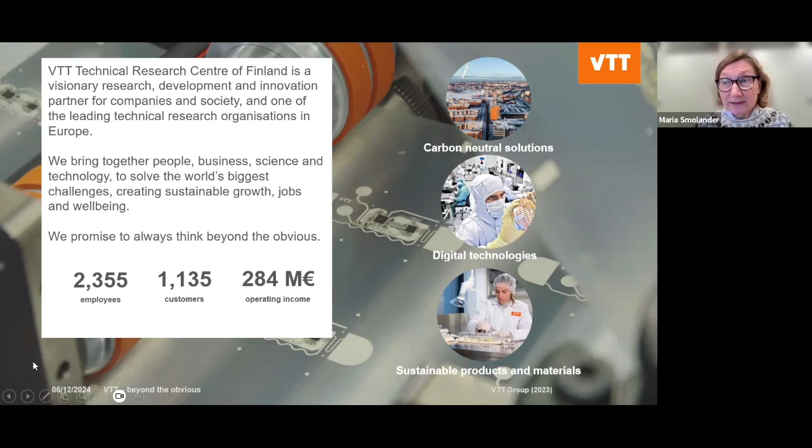We have divided our activities into three business areas: carbon neutral solutions, digital technologies, and sustainable products and materials. Flexible and printed electronics is in the digital technologies business area, but we collaborate a lot with colleagues in sustainable products and materials, who produce materials that we use. We also work with colleagues in carbon neutral solutions, who, for instance, apply the battery solutions we develop at cell level in our research area, for mobility applications. So this is very shortly about VTT.

As said, we have really been tackling sustainability, including the sustainability of flexible electronics, for a couple of years now, and we are very motivated to do that. This is, of course, because we, as everybody else, see that the amount of electronic devices in society is increasing all the time. We need electronics for digital transition, for connectivity, for different household applications, transportation, and applications in health and well-being. And of course, this increasing amount of devices is also bringing more and more electronic waste around us.

For instance, between the years 2010 and 2022, the amount of e-waste almost doubled. At the moment, a bit more than 20% of e-waste is formally, properly collected and recycled. This recycling rate is increasing all the time, but because the amount of waste is increasing so rapidly, waste generation is outpacing the recycling rate. So all the time we are accumulating more and more waste around us.

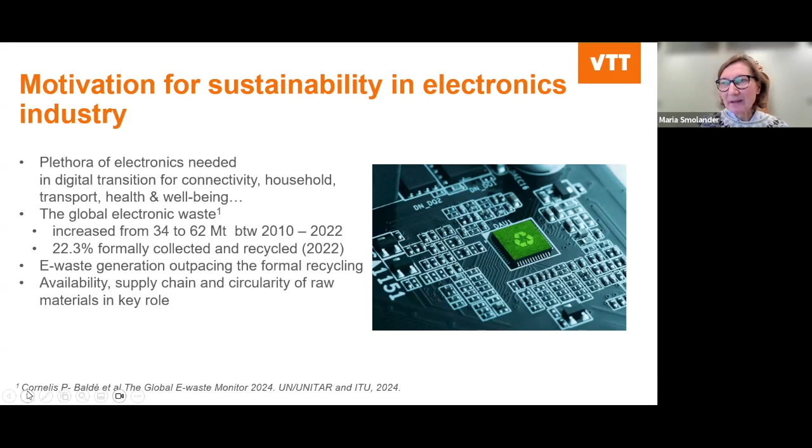Also today, especially in the current political situation and in these unsecure times, supply chains are not as secure anymore as they used to be. So it might be that some critical raw materials are not available, and some of the raw material sources are not infinite. So the circularity of raw materials is very important, and we want to look at these challenges in the development of flexible, sustainable electronics.

We've tried to take a kind of holistic approach towards the sustainability of flexible electronics, looking at the whole chain from product design, through material selection and process selection, to the use phase and end-of-life or disposal phase of the product. In the design phase, there are possibilities in selection of powering solutions, and design of modular products which can be partially recycled. Regarding materials, we can select renewable, abundant raw materials wherever possible.

Regarding processes, printing, which is a main production method in flexible electronics, that is additive manufacturing, which has beneficial characteristics for the manufacturing as it is very material efficient, and also the use of energy is relatively low.

And then of course we want to develop solutions which also increase the sustainability at the use phase, and also what needs to be taken into account is the end of life strategy. So how to design products which can be partially recycled, and if not, then how are they fitting into the existing waste streams? How could the existing processes be exploited?

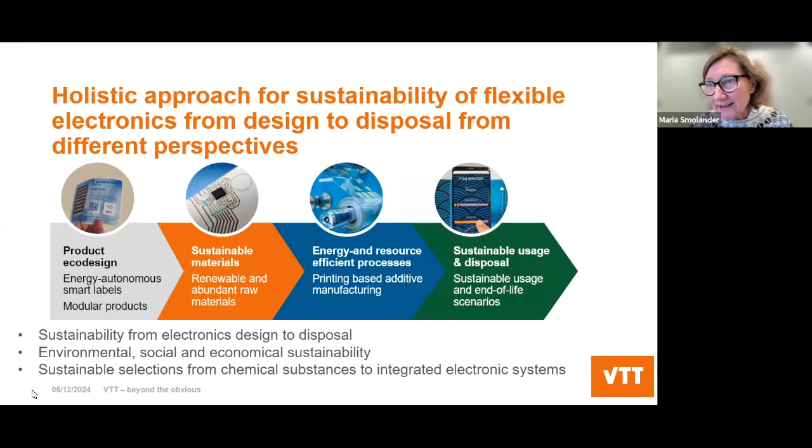And basically, of course, the environmental sustainability is important, but we also want to take into account the social and economical sustainability. For instance, the social sustainability is important when you are thinking about the use phase and the purpose of the products that are developed, and basically we want to make sustainable selections all the way from the material selections to the integrated electronic systems. So this is the overall picture of our holistic approach to sustainable flexible electronics.

And I already mentioned in the beginning that circularity is the key, because we are indeed running out of some necessary critical raw materials. So it's important to keep the materials in use.

So traditionally, in linear economy, we start from raw materials, go from design to manufacturing, distribution, consumption, end of life, and then eventually the products end up in landfill or incineration, or they end up as waste, and the materials are not necessarily reused anymore.

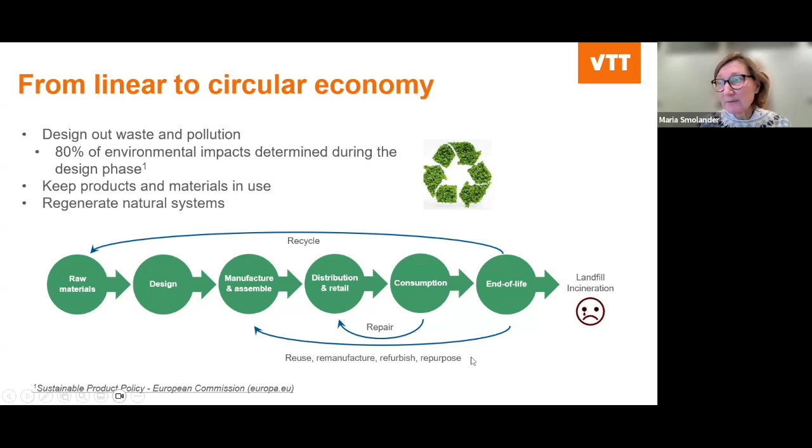And this is of course not so good, but it would be more beneficial when you can repair the items, when you can recycle either the raw materials or maybe even the components. You don't need to go all the way to the raw materials, so you can disintegrate some of the components and remanufacture them, reuse the components. So this is also saving energy and resources.

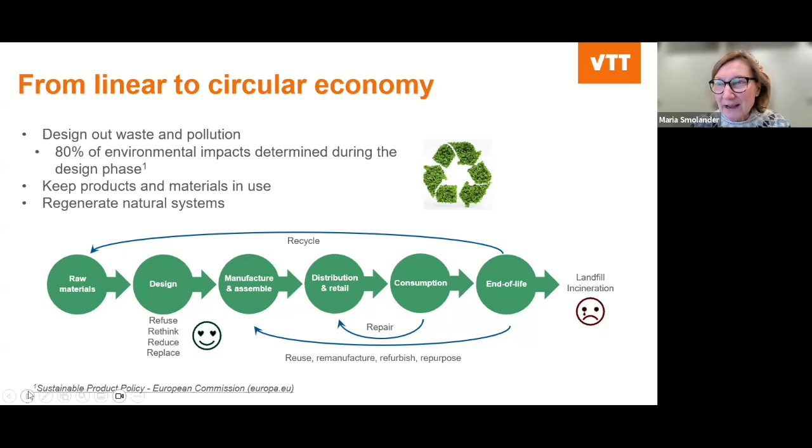So it's important to keep the products and materials in use. And of course, in the first place, we need to think about whether we even need new items all the time, and we should consider our consumption as well. But this is something we are aiming to support in the design phase, and try to design products which are compatible with this circular thinking.

So as we have now seen, this sustainability and circularity of electronics, even of flexible electronics, is a very wide matter, and it's very important to join forces to develop new solutions. One example of joint activities in this field is a project called Sustronics, Sustainable and Green Electronics for Circular Economy. This is a CHIPS joint undertaking project, a European project, coordinated by Philips in the Netherlands, with VTT as the technical manager. All in all, in this project, which is now halfway, we have over 40 partners from 11 countries, and the budget is almost 40 million euros.

Basically, the work here is arranged into three bigger use cases. Each of these contains different pilots, but the focus areas are circularity of electronic devices, meaning conventional rigid electronics in this case, then sustainable manufacturing for electronics, which is quite a lot related to flexible electronics, and also environmentally compatible single-use electronics is handled as one use case here. This is now halfway, and we are starting to get results, and it looks really nice. I'm sure I'll be able to talk about this project also in later events.

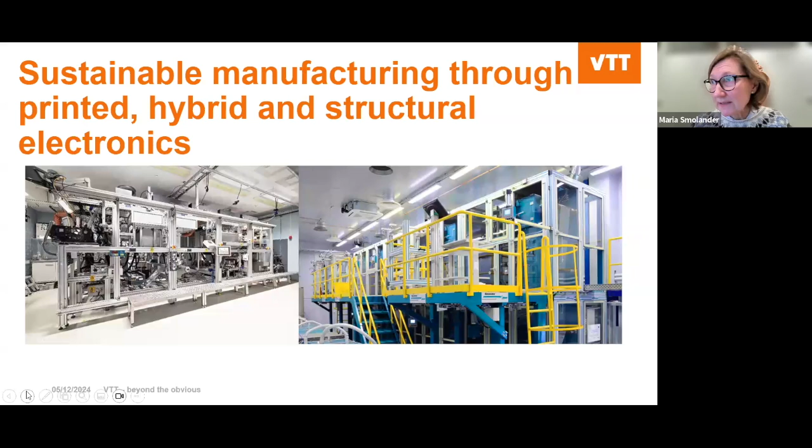We also have the possibility for hybrid assembly of components, and this is all possible to do in a reel-to-reel process. So basically you can get a huge roll of electronic devices as the outcome from these processes.

And why do we want to work with this reel-to-reel process and this kind of flexible electronics? As already mentioned, it's an additive manufacturing method, pretty material efficient, environmentally sustainable in that sense, but there are also other benefits like freedom for different designs and new form factors.

It's compatible with large area product designs and product architectures. Even stretchable materials can be used as printing substrates, so we can generate different wearable electronic devices. Sometimes the product structures can be simplified—you can integrate the electronics into mechanical parts of the products, meaning there are fewer separate parts. This results in reduced product volume, thickness, and weight, which is also sustainable, as is the manufacturing method itself.

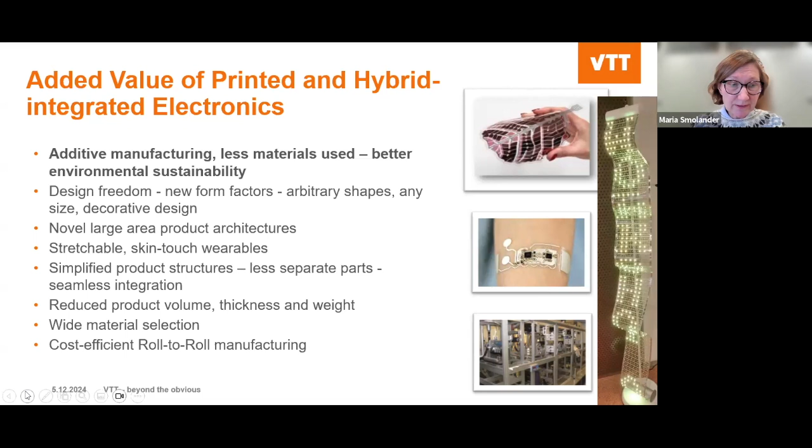The reel-to-reel production methods, the printing methods, are compatible with a huge variety of different printing substrates, which means we can even exploit materials that are renewable and sustainable in that sense. And when we go to high enough volumes, the manufacturing is also cost efficient.

So this is kind of our key operation in flexible electronics. A couple of years ago, we started a national-level project called Ecotronics.

In this project, we collaborated with Finnish universities—specifically the Lappeenranta University of Technology, who carried out the LCA work. We wanted to compare the environmental impact of printing versus the traditional FR4-based PCB process. In the comparison, we saw that if the etched copper in the conventional PCB process is replaced with printed silver conductors, the global warming potential is already reduced to about half of the original.

And further, if it's possible to replace the FR4 with a flexible substrate, either polymer-based PET or paper, the global warming potential is reduced even more, down to about 14–15% of the original, which is of course very nice.

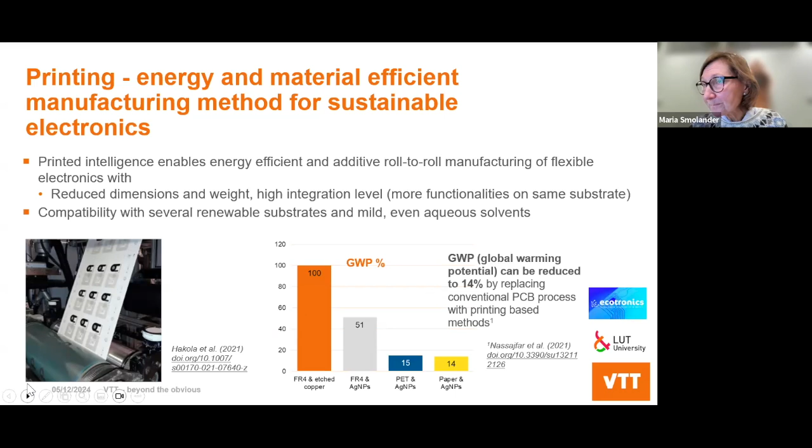So the process is pretty good from a sustainability point of view. In the same project, we also investigated the LCA of a smart label, which was our example case in this project.

So basically, we now know that the process is a pretty good selection—that we've chosen this printing-based fabrication. But we also wanted to look at the conductive materials and the substrates.

Regarding substrates, very typically in flexible electronics, if the material doesn't need to stretch, PET is the conventional plastic used in printed electronics. But it's possible to replace that with some renewable materials too—even PET itself can be based on renewable resources; it doesn't need to be fossil-based.

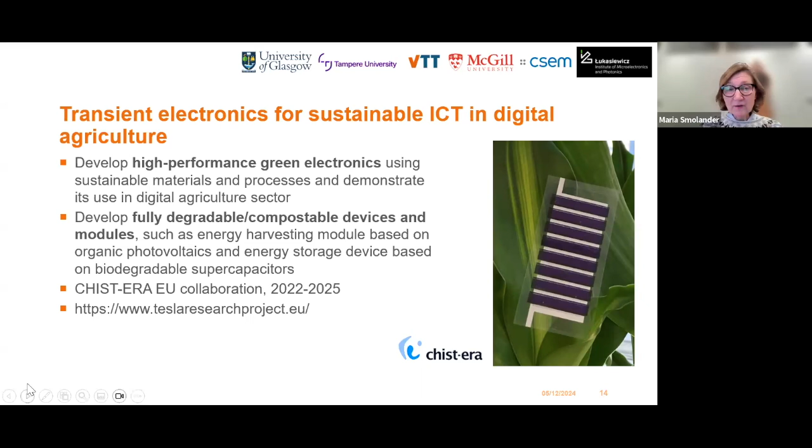A similar approach has been taken in an ongoing CHIST-ERA project, Tesla - Transient Electronics for Agriculture - and in this project it's more or less the same, though the device is a little bit more complicated: an energy autonomous, self-powering sensor for plant condition monitoring. In this case the device contains the OPV, again printed supercapacitors, and a reusable electronic module - at the moment it's reusable, but in the future it might also be more transient - and then transient sensors for plant condition monitoring. VTT's role in this project has been the development of the transient, soil-compatible OPV, which is a continuation of the earlier OPV work.

Now we've talked quite a bit about this smart label, and the ecotronics project has been mentioned in a couple of slides earlier. I would still like to say a couple of words about the use case for this label. Of course it is clear that the fabrication of the label has a certain environmental impact, but it's good to also consider what the effect is of the use case, or the use phase, of the item we are developing and producing.

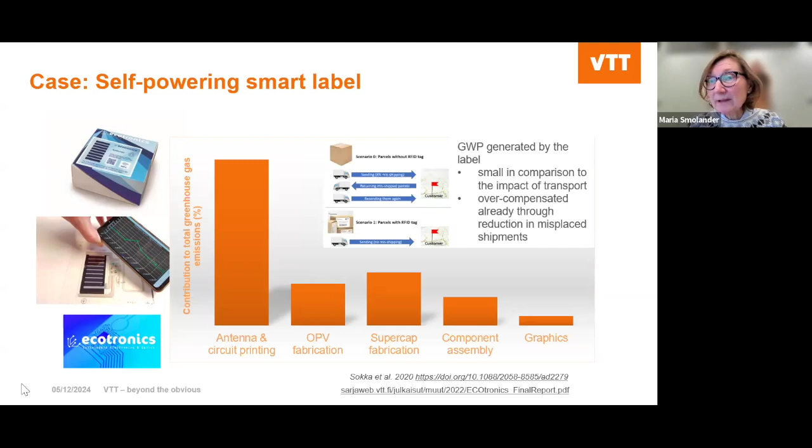Here are the greenhouse gas emissions from the fabrication, but it has been calculated that if this label is capable of even reducing the amount of shippings during transportation, it already overcompensates the environmental impact in the manufacturing phase. And of course, if you're able to decrease the food waste, which is a considerable issue, that gives even more overcompensation to the fabrication of the label. So you always need to think about the use case when looking at the environmental impact of the fabrication of a certain item, and this is very, very important as well.

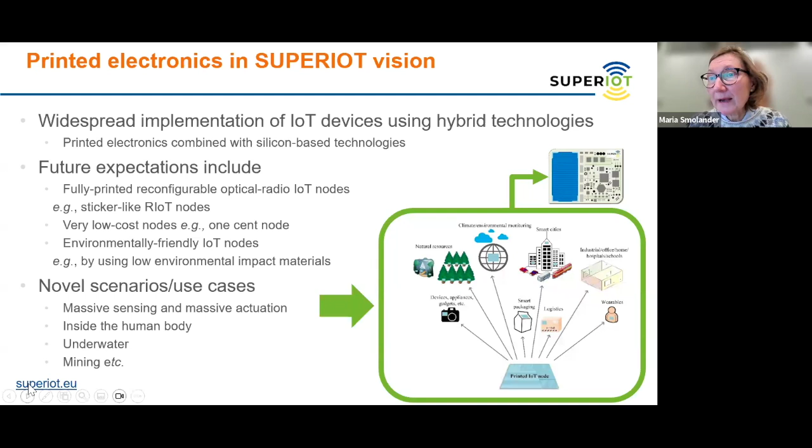This similar approach we are currently also taking in another European project called SuperIoT. In this case we want to extend the use of this kind of small, low-cost, sustainable IoT devices for different applications, like in addition to smart packaging and logistics, also climate and environmental monitoring, different home and workspace environments, wearables, smart cities, and so on. And in this project, what is new? In the previous one, the Ecotronics project, we had silicon-based components, but in this project we are also looking at printed electronic devices like diodes, and want to use printing to realize part of the electronics. So this is ongoing as well.

For that purpose, we are currently investigating at VTT a very unique printing method: reverse offset printing. What is so unique about this is that it's possible to print lines with a width of about 1 micrometer, which is not usual for printing-based methods. This is not a reel-to-reel method, it's a sheet-to-sheet method, and I will show a small video on how it works. It is really suitable to produce thin lines, and can be applied in printed electronic devices like TFTs, but also transparent grids, anti-counterfeiting, sensor applications, and so on.

I think the video comes now. Yes, and I will first explain a little because it's pretty fast. What happens first is that the ink is applied on a PDMS blanket through capillary coating, and then this blanket is patterned with a printing plate that has a negative image. Then the PDMS blanket has this semi-dry ink, which is then transferred to the substrate, which can be basically anything as long as it's smooth enough.

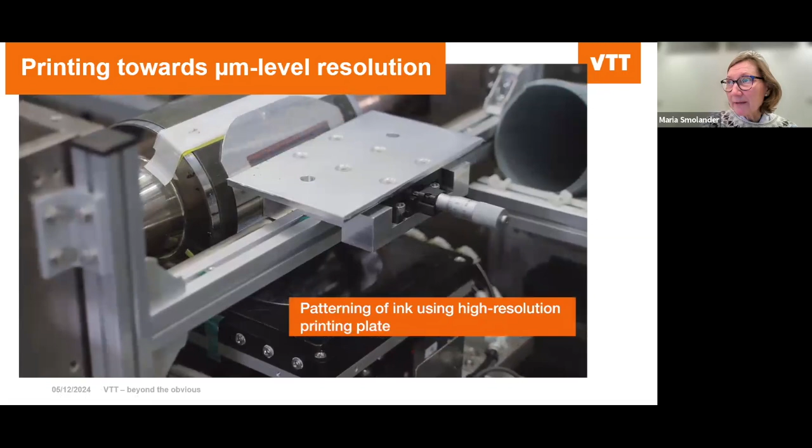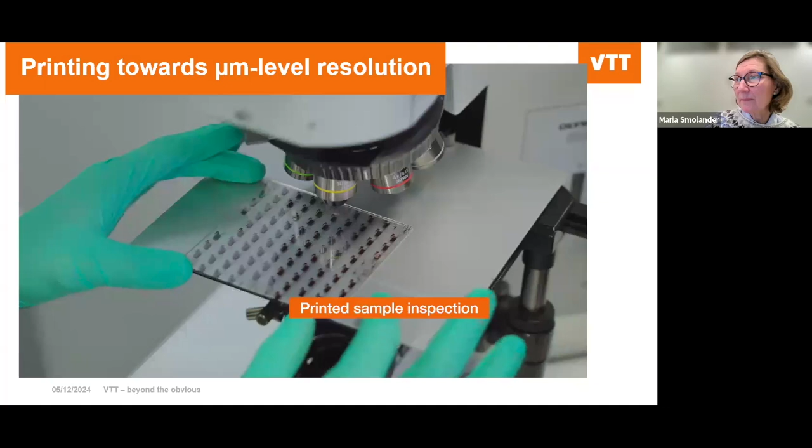I will now show the video because it immediately starts with the ink application on the PDMS blanket. Now we have the patterning of the PDMS blanket. You can see the pattern appearing, and now the plate is removed and the substrate comes instead. Now the ink is transferred to the substrate. In this case it's glass, but it can be anything smooth. Then here we have the devices, and it's taken to inspection. Indeed, the line width is about 1 micron and alignment about 2 microns, and this can be applied in different devices and applications.

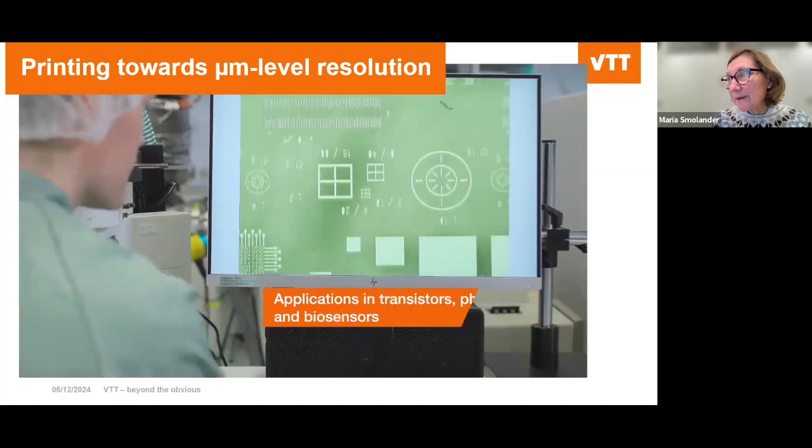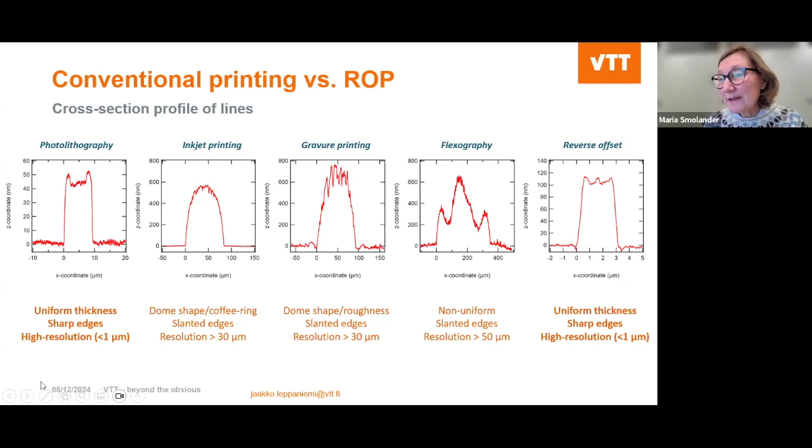Indeed, as mentioned, this is a very unique printing method. Basically, the outcome is very similar to photolithography. If you compare it to other solution deposition methods like inkjet printing, gravure printing, or flexography, the line width is much thinner. Also, what is very unique is that the printing pattern has very distinct edges, really very sharp, and this is a very nice property as well, as you can anticipate.

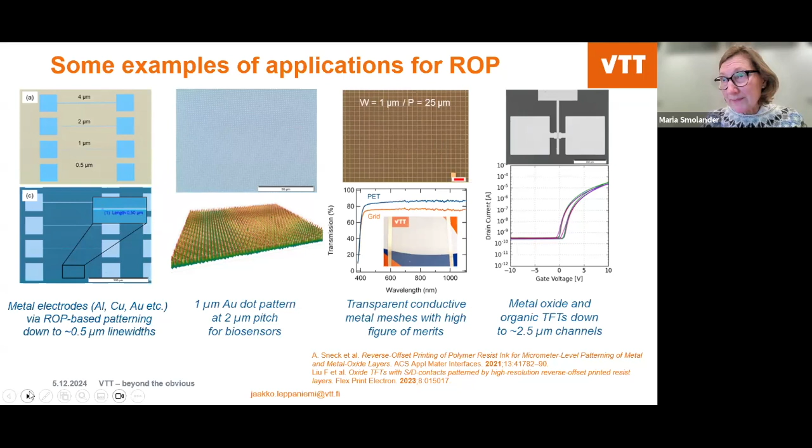Here are some examples where it can be used: for metal electrodes, for instance for multiplexed sensors, like a gold pattern multiplexed basis for multiplexed assay for biomolecule immobilization, metal meshes for heating applications, transparent antennas as well, and also metal oxide and organic polymer-based TFTs. So these are the applications, and the idea is to exploit these solutions, which include more printed devices, not only silicon-based.

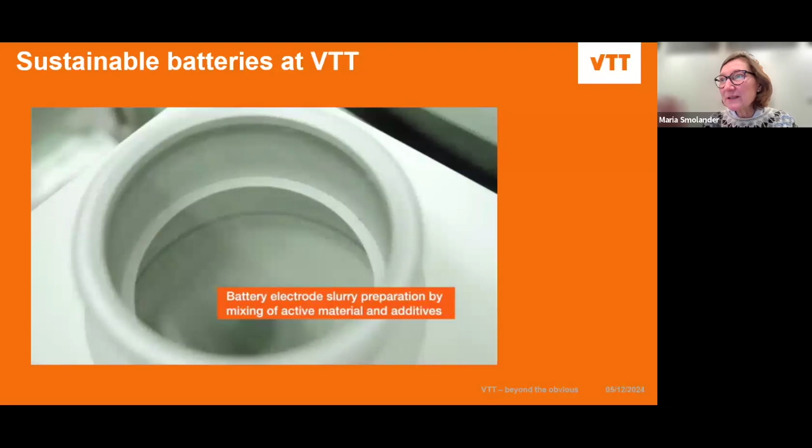And then I would like to briefly talk about powering and batteries. We are also looking at next generation batteries at VTT, especially in collaboration with our colleagues working with sustainable materials. This shows the process, which starts with the electrode slurry preparation, and the slurry can be based on, for instance, biocarbons.

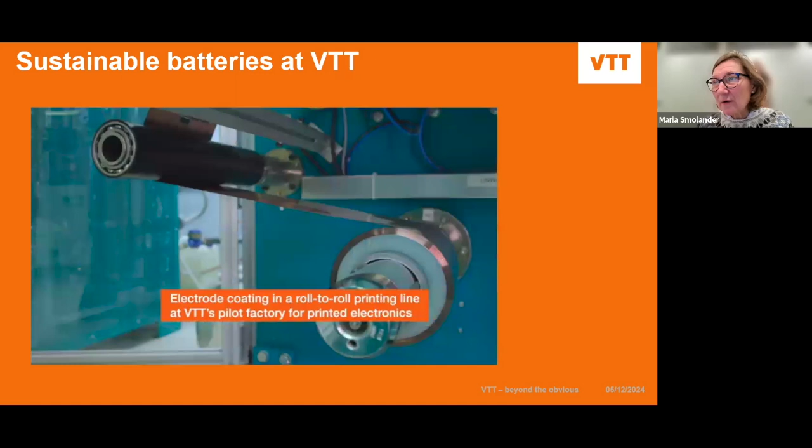And then the electrodes are coated with slot die coating in this roll-to-roll printing line in our pilot factory. So that's taking place here.

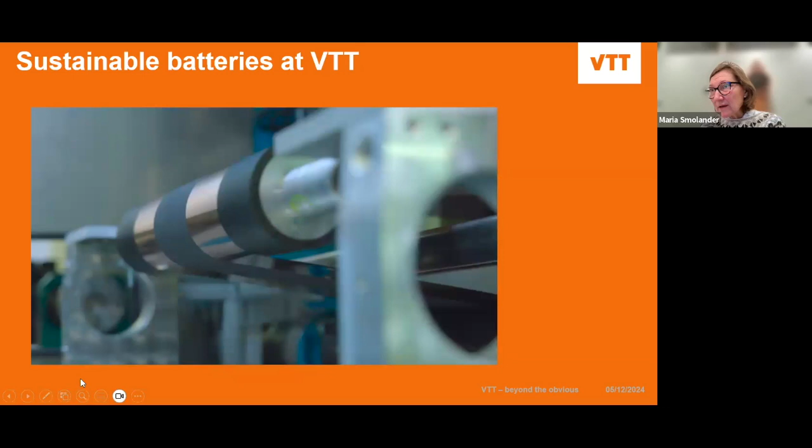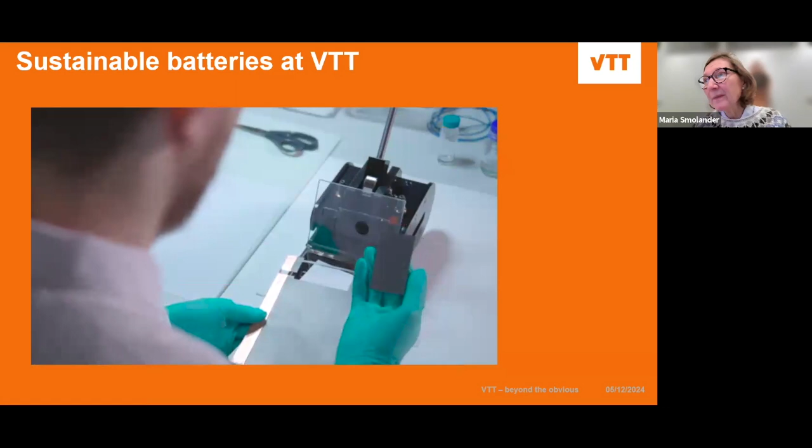And then comes the manual phase. So at the moment we are assembling the batteries manually, but also here we want to go into more automatic procedure. So basically what you do, you cut the electrodes and then stack them on top of each other. And this can be done in the normal atmosphere, of course, depending a little bit on the chemistry.

But then it is put into this encapsulation material and then taken to the oxygen-free argon glove box, where it is sealed and then dried, and the electrolyte is filled in. Okay, now it's vacuumed a little bit. Electrolyte goes in, and then it is sealed.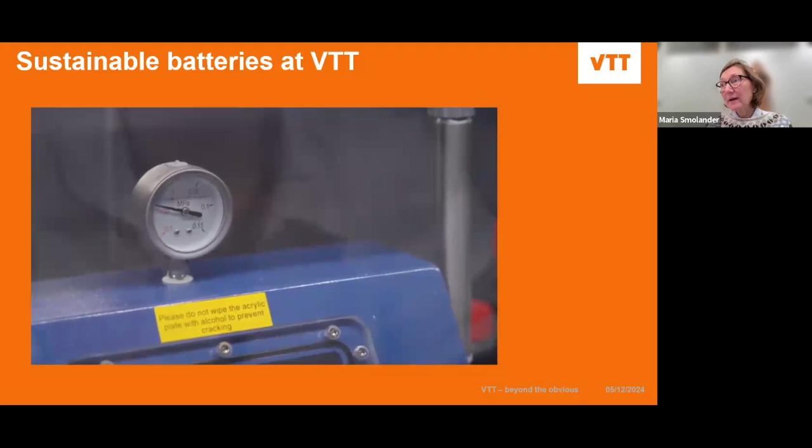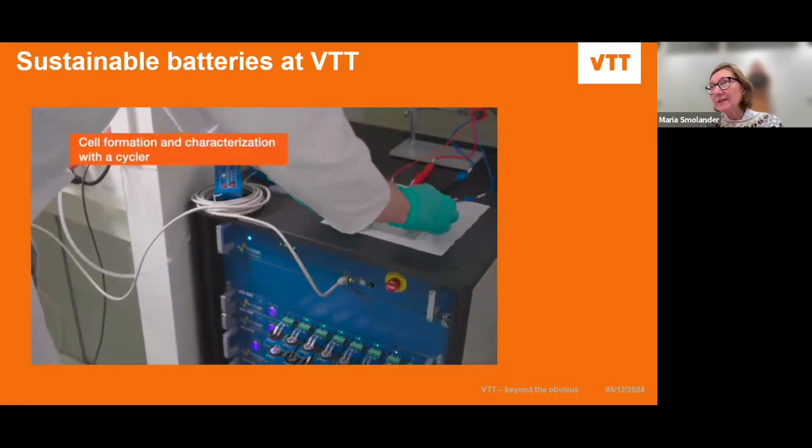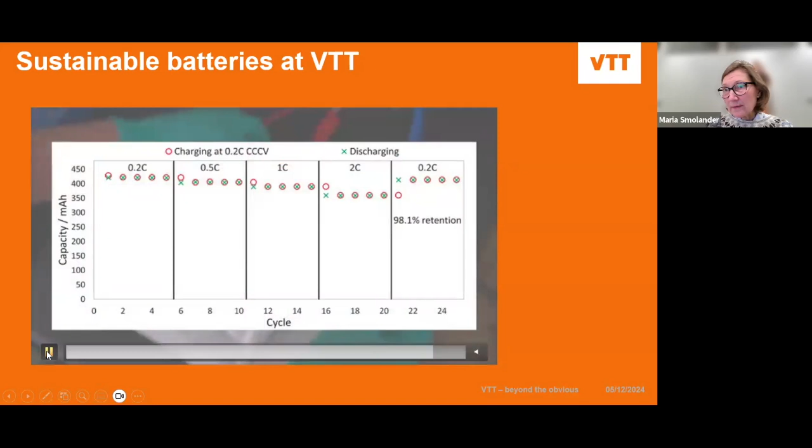And indeed, basically, we can do both these pouch cells and also the coin cell batteries at VTT, and we are exploiting here the new materials from our colleagues. And then after this is ready and sealed, it can be again taken out, and then the power source will be characterized in the cycling system. So this is how the batteries are assembled by us.

And regarding the sustainability in this battery area, okay, other colleagues are investigating the circularity. For us, the focus is more on the selection of materials, like replacing lithium with sodium, graphite with lignin-based hard carbon, and also using cellulose-based separators.

And then this processing using this reel-to-reel printing, also dry coating without solvents, and also what we have been looking at, the increase of the lifetime of the batteries by different strategies which are preventing the dendrite growth on the electrodes, and this is beneficial for the lifetime of the battery electrodes. So this is investigated in several EU funded projects.

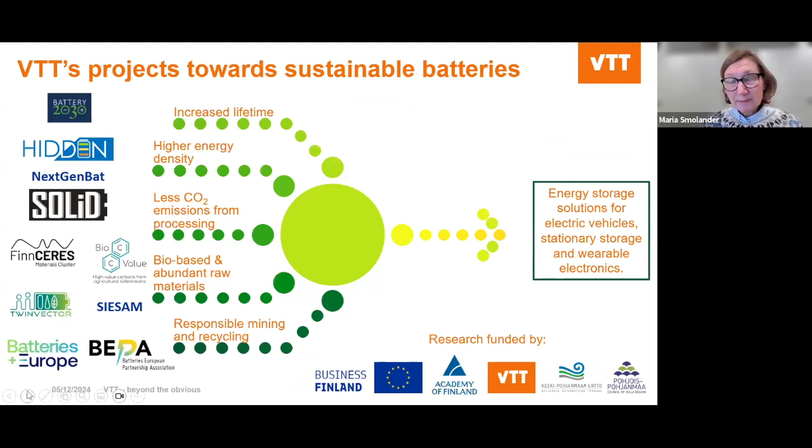Then finally, maybe briefly still, a couple of words about our GreenTool. So as we have already seen, there are several aspects which should be taken into account when you are considering the sustainable fabrication of flexible electronics.

And okay, LCA is a kind of very useful tool, but normally in order to implement the LCA assessment, you need to know quite well what you have done, and you need to know the materials and how much and so on. But we wanted to have something for the design phase, something a little bit streamlined, so that we could already from the beginning make some selections towards more sustainable approaches.

And so we developed and published an Excel-based tool, what we call GreenTool. And this is very much based on the Eco-Design Directive, Sustainable Development Goals, and Green Deal.

And what we do then when we are considering a development of a new flexible device, or actually it doesn't need to be flexible, but a new electronic device, we select a benchmark like in the case of smart label, it can be a data logger with coin cell batteries, and then describe the processes or the anticipated processes for next generation products, and then we start looking at this and start benchmarking and comparing these new developments against the state-of-art benchmark.

And we score each of these new concepts against this benchmark with a score where 3 is similar to the baseline, the benchmark, and 1 and 2 are worse, and 4 and 5 are better. And these are then evaluated for each of the sub-criteria. And we have done this for the smart labels.

This has been explained in the same paper where we explain the methodology. And in this case, we were comparing the state-of-art data logger with a printed logger with flexible batteries, a printed logger with OPV-based energy harvesting, and then the same one but with environmentally optimized materials.

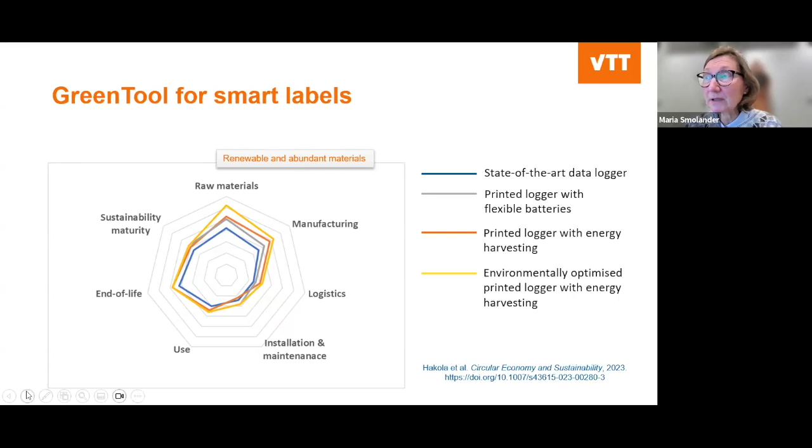And here what we could see is that regarding raw materials, where we could see the biggest differences, the differences come from the possibility to use renewable abundant raw materials. In manufacturing, the difference comes from additive manufacturing. In logistics, mainly from the lower weight and possibility for distributed manufacturing.

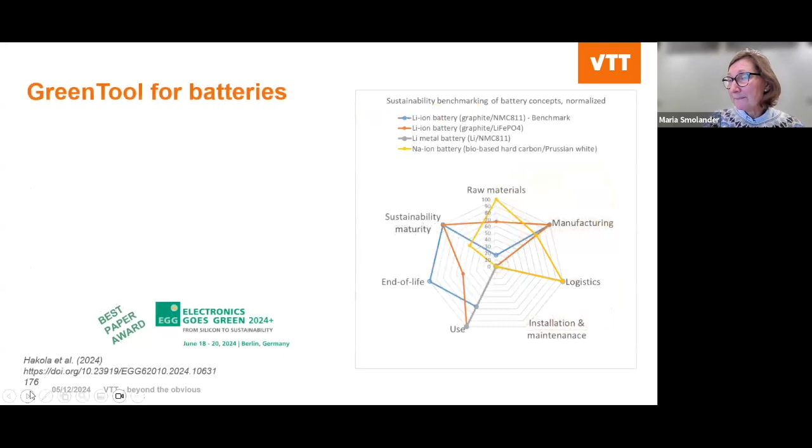Then we did the same for the batteries as well. We modified this assessment matrix a little bit, and in this case we had two state-of-the-arts, like lithium-ion battery with cobalt cathode and cobalt-free cathode, compared with lithium metal battery and sodium-ion battery. What we could see was that the new technologies have different strong areas - for instance the sodium-ion battery has benefits in raw materials, whereas the lithium metal battery has higher energy density and improved better safety.

This is explained in the conference paper presented in Electronics Goes Green conference last summer, and this actually got a best paper award in the session. If this is of interest, you can find the details in the paper here. Regarding these new battery technologies, especially the end of life management is not very mature yet in comparison to the state of art batteries.

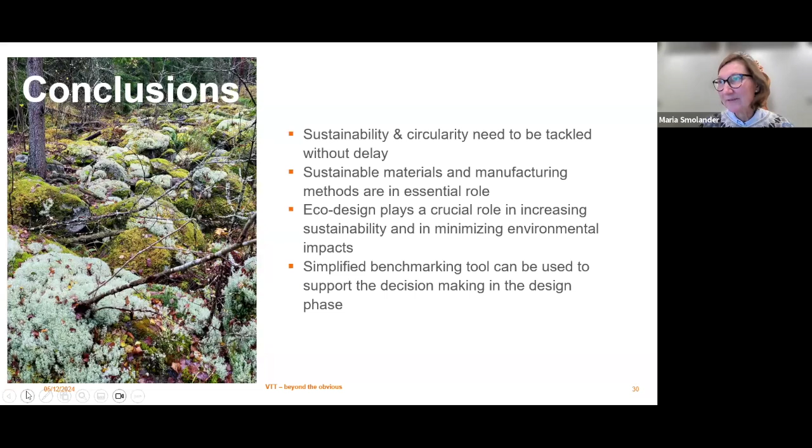Now I'm coming to the conclusions of the presentation. I'd like to say that sustainability and circularity in electronics need to be tackled without delay. The materials and manufacturing methods are in key role, essential role, and also the eco-design. The design phase is extremely important - about 80% of the environmental impact is decided already then. Now we have a very simplified benchmarking tool which can be used in decision making already in the design phase.

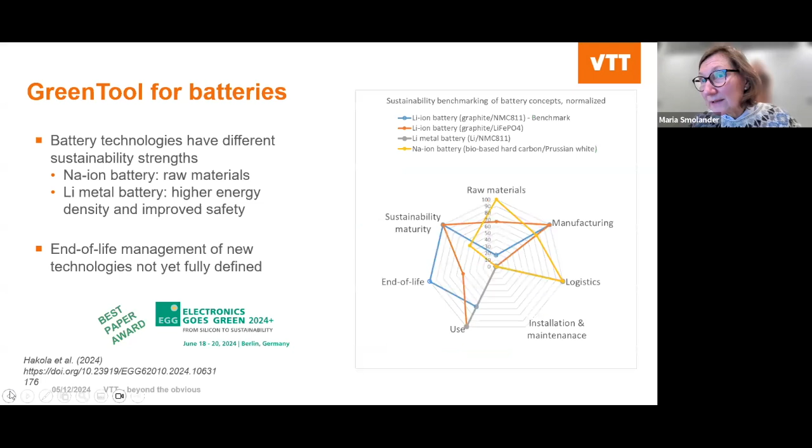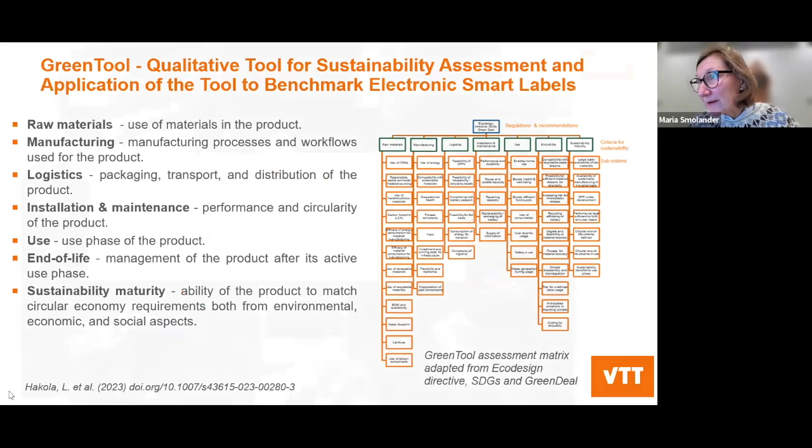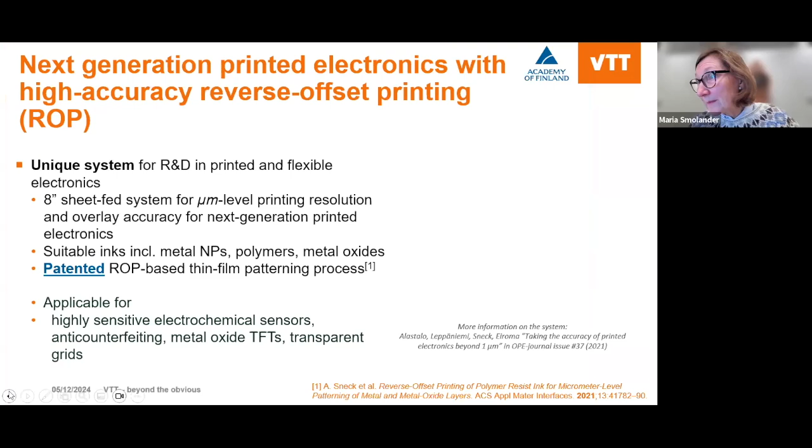Okay, thank you. You're welcome. Do we have time for one more question here, or do we need to move on? I think we're doing okay, Fengyuan, why don't you ask the last question?

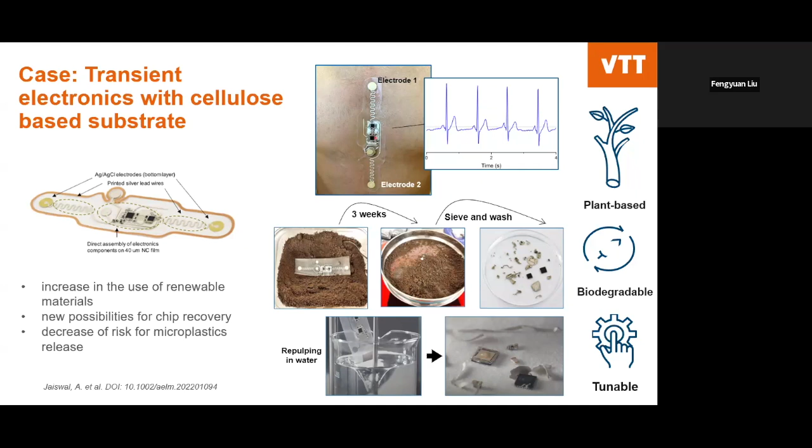Okay sure, thank you for your nice talk. So for now we have seen many papers on printed electronics, but in terms of the real products, there may not be so many products based on printing. So what do you see, how do you see this?

I think that regarding applications, wearable electronics is definitely an important one. I didn't stress that in this presentation because this was more for sustainability, but what is possible is to print these conductive circuits on stretchable materials, increasing the usability of wearable patches. For instance, you can have electronic tattoo type structures on skin, or like in this picture, a nanocellulose based patch which is very conformable, and this can be on TPU as well. TPU has been the main substrate for wearable electronics.